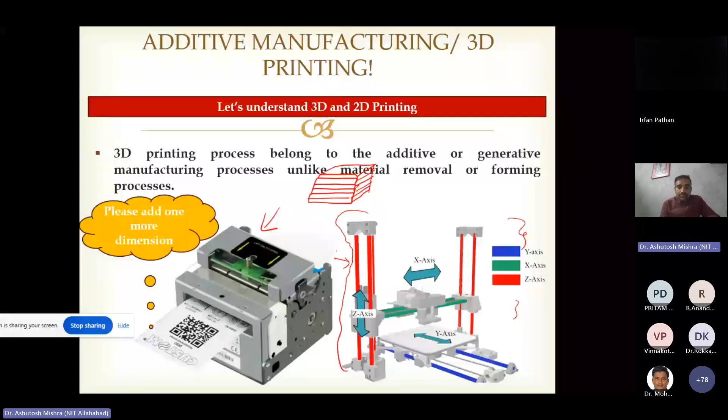And there are several precise, improved, advanced additive manufacturing processes nowadays which are actually being used for manufacturing the final finished product. Of course, certain post-finishing operations and some treatments are required, but the shape and geometry at this point is the desired one, which we require for the supply of the final product. A prototype can be a model prototype, or a scaled down model, or anything for proof of concept. So the application of additive manufacturing includes prototyping and manufacturing both.

The part is manufactured by the deposition of material, and it is used in a wide variety of industries, from shoe to car manufacturing. As we have seen long back, a car made of carbon fiber was made from additively manufactured parts, and then it was assembled. So I cannot say the whole car was made through the additive manufacturing route. But what I can say is that if there are 1,000 components, then out of those, around 100 components can be made by the additive manufacturing route.

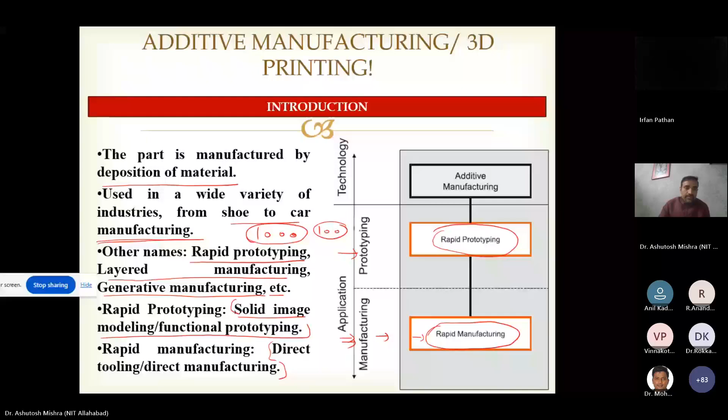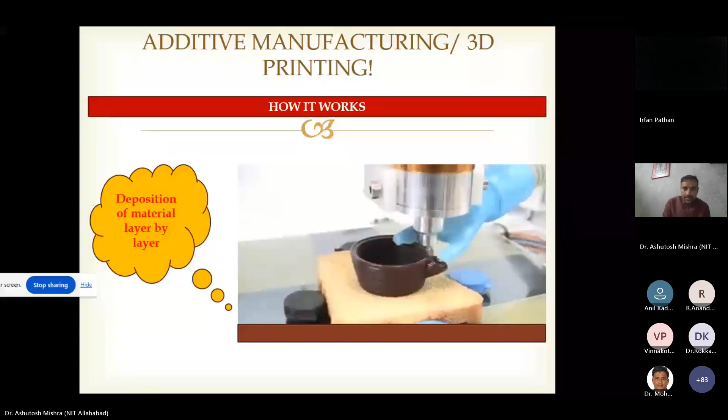Considering the full scale model, for metallic or metal based 3D printed products, there is certain literature which reports that their strength is better than the conventionally made parts. I'll discuss later in the second part how the strength of these metal products can be changed.

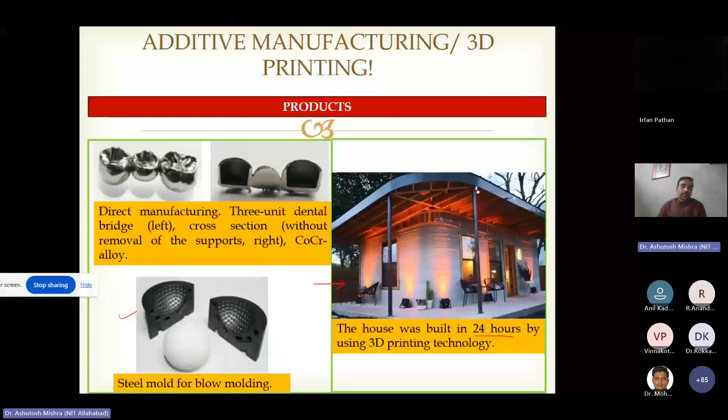Then we have solid-based additive manufacturing or 3D printing, where the raw material is solid. The commonly used process is FDM, that is fused deposition modeling, which is widely used for polymeric materials or thermoplastics. FDM was used for one of the research works which I had done earlier, so I've included a few results of that work.

Now the third is powder-based printing. One of the common powder-based printing methods is the powder bed fusion technique, and SLM falls in this category. In powder-based printing the material is powder: selective laser sintering, or SLS, and SLM, that is selective laser melting. SLS and SLM are both types of powder based printing, and mostly they are used for fabrication of metal parts.

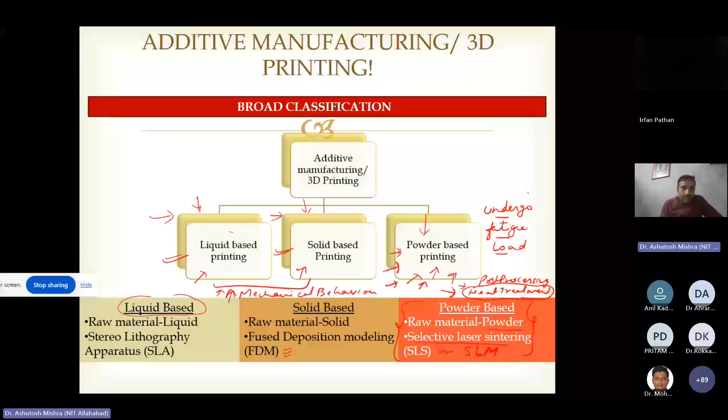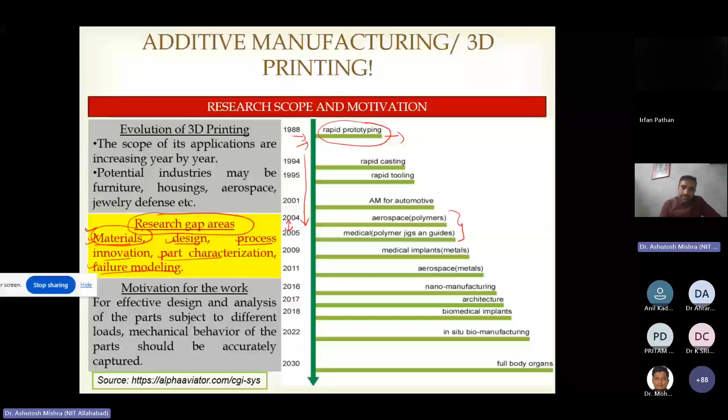Now coming to the motivation, as said, for effective design and analysis of the part subject to different loads, the mechanical behavior of the part should be accurately captured. For capturing the mechanical behavior, we can conduct experiments as well as numerical models. But as I told you, SLM printed parts are very costly to fabricate. So numerical modeling will be the tool to help us reduce the cost.

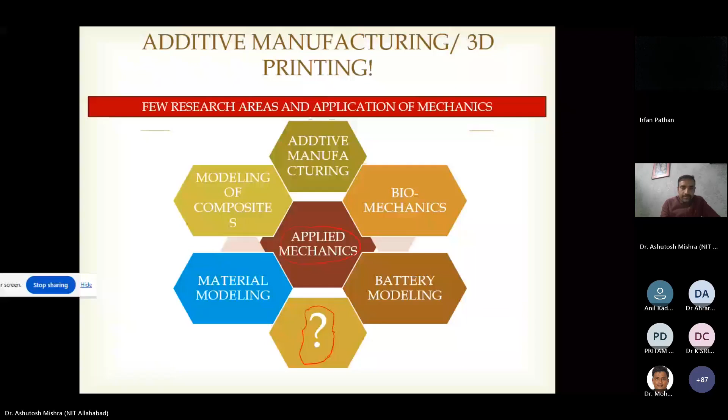So specifically, I wanted to enhance the strength of the material. If we compare the strength of conventionally made material and 3D printed material, the 3D printed material lags in strength. So if we can use some heat treatment or post processing by which we can improve the strength, we should try that. With that aim, I started experimenting, and these are a few outcomes of those studies.

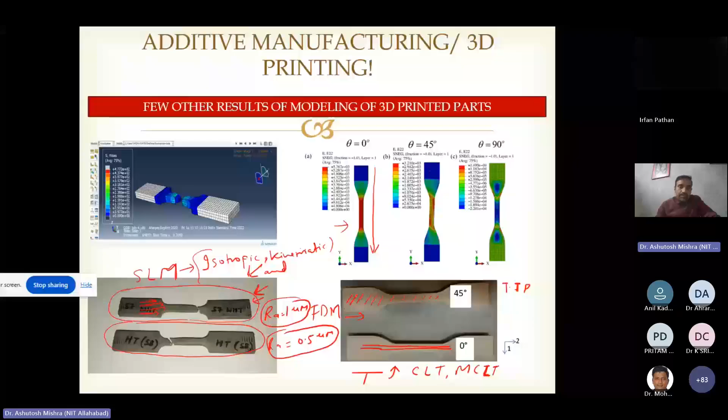Most of these projects deal with composites and finite element analysis. I'm also taking some industry projects, wherein I am teaching design of advanced shock absorbers, and teaching finite element analysis to industries, that is Munjal Showa Limited in Gurgaon.

Then we have computational modeling for design of insensitive munitions to mitigate sympathetic detonation. This is a DRDO project wherein the mechanics of the detonation process of explosive warheads is being studied.

Then there are other projects on mechanics of bones. The experimental part is done by the PI, Dr. Abhishek Tiwari, and I do the modeling process.

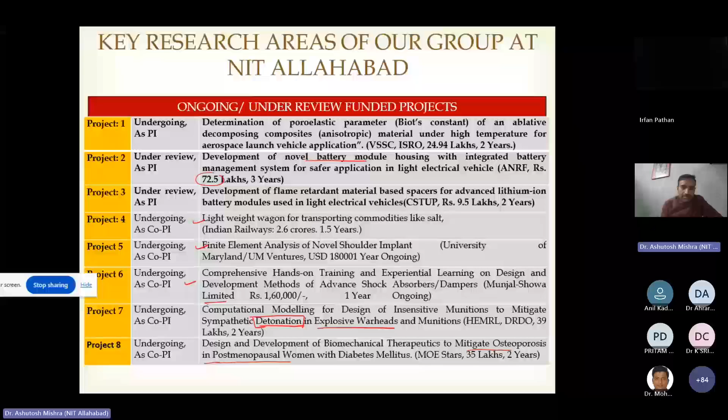Okay, coming to part 2, that is experimental and numerical modeling. So let us see.

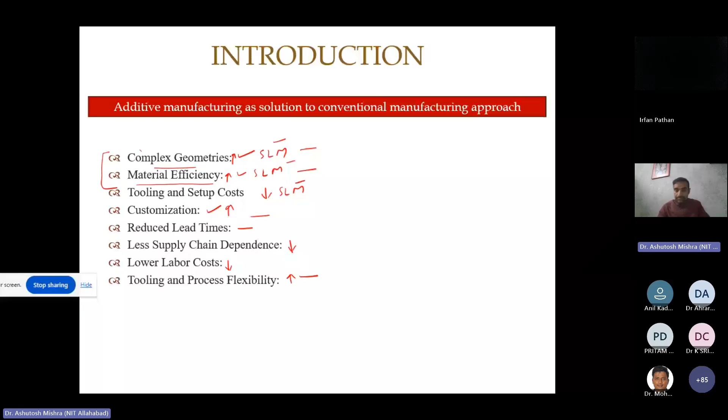Now, this section will cover the fatigue behavior of parts fabricated by SLM printing, widely used for metal part fabrication. Considering the importance and significance of the SLM process, that is selective laser melting process, I have chosen this particular process for making the part and carrying out the fatigue study.

Now, fatigue is a major load - a major failure-causing load for parts or components in moving applications, wherever there is relative motion, or machines which undergo cyclic loading. Fatigue is the major load which actually governs the failure. So I've tried to model fatigue behavior and included this in the presentation.

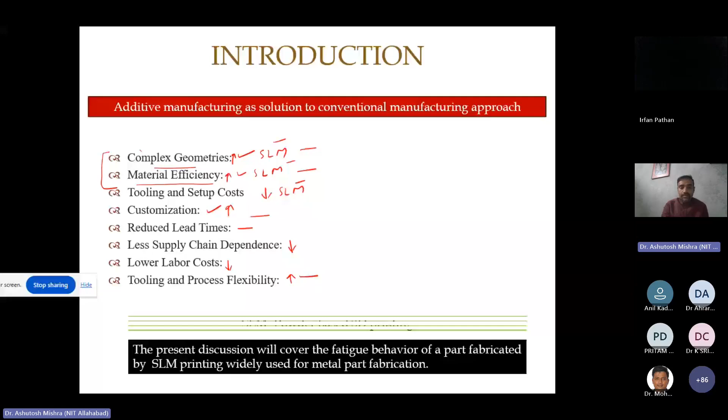The SLM is a powder-based printing process, as said. Now, fatigue is cyclic loading - just for introduction and completeness, I want to give a brief about fatigue. It's cyclic loading in the material such that localized stress leads to crack initiation, growth, and final fracture. It has two main types: HCF and LCF. The current study focuses on LCF, which is critical for assessing the mechanical integrity of materials under cyclic loading conditions. Both LCF and HCF can be strain controlled or stress controlled.

That is, if it is stress controlled, then the commonly known mode of failure is ratcheting.

That is ratcheting, that is again a mode of failure. If it is stress controlled, the common mode of failure is ratcheting. Now, ratcheting, if it is extended beyond certain load, beyond certain number of cycles, it again reduces to HCF. That is, ratcheting finally leads to high cycle fatigue failure.

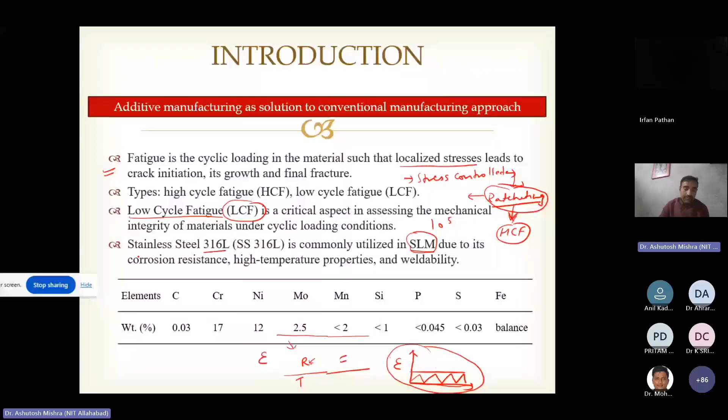There is a constraint for us also. I could not use the other, that is, I was trying to use stainless steel 316LN, but the SLM available at my place — meaning one of my consultants in Rajasthan who has made this part — they have SLM mainly used for stainless steel 316L. So they may require parameter changes, the cost will change and the parameters will change, and they do not have the expertise to change the parameters according to 316LN.

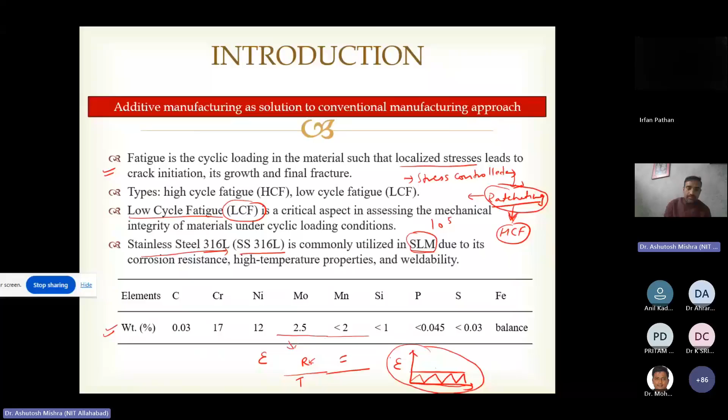So I used this SS316L material for the study, and it is a common industrial steel, so it justifies the choice of this steel also. Now the composition shown here is for reference, if someone wants to use it they can. The specifications and results are also published in Engineering Failure Analysis.

Now, before we again enter into the results and outcomes of the findings, let us understand what selective laser melting is, briefly. It is like a powder — if you see, powder is there, and between that powder there is a part, this hexagonal part. If you can see, this is the laser.

One more thing, this is not a continuous laser. It appears continuous, however it's a pulsed laser — a very high energy density pulse laser. In most YouTube videos you can see a pulsating kind of light with very high specific energy, which collides with the powder and melts it. As soon as the path is traced and the desired layer is made, the platform is lowered. Once lowered, the leveling roller again supplies powder to this particular section.

If we see the advanced form of additive manufacturing, it uses a high powered laser to selectively melt and fuse fine metal powders to create 3D parts layer by layer. It is one of the common techniques used in metal 3D printing, specifically for applications requiring high precision, complex geometries, and high material strength. So we have comparable material strength when we make parts using this method.

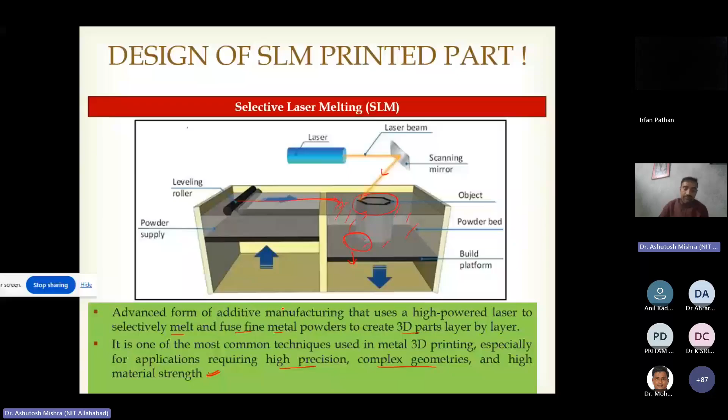This particular sample is made up as per ASTM E606, which is used for strain controlled fatigue loading.

Build orientation has a strong influence on the static and dynamic mechanical properties of SLM steels. Regardless of their building direction, the majority of SLM specimens showed inferior fatigue characteristics compared to their wrought counterparts. However, post heat treatment and post processing actually improve the fatigue characteristics.

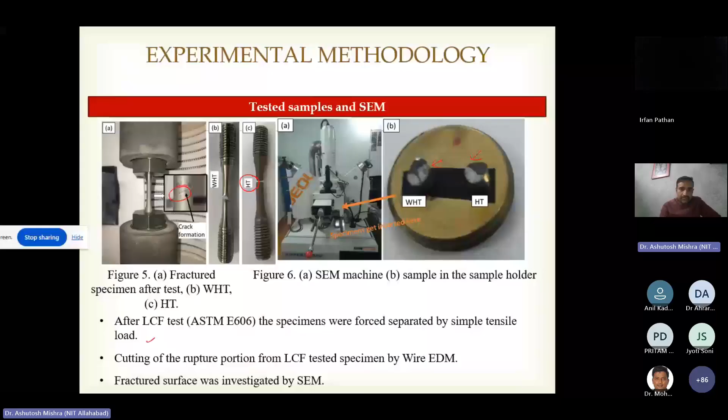Okay. Well, I considered only the length of the gauge section for modeling it in Abaqus. The data which is written is slightly, it's a typographical error. Then I've considered hexahedral element shape and swept meshing technique for linear 8-node brick element of C3D8R element type.

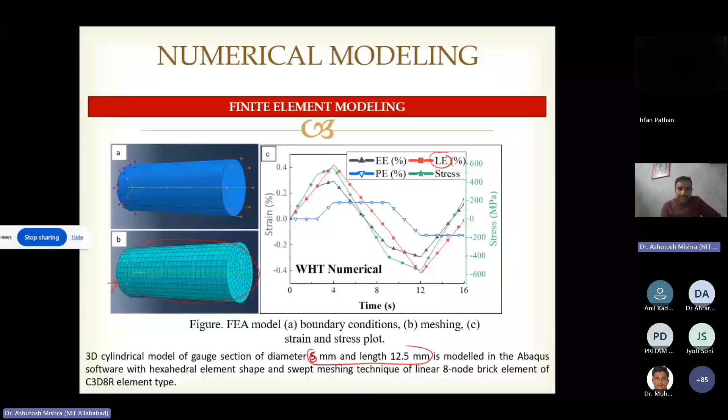And for modeling in Abaqus, we can import the cyclic results in other softwares. So I have included up to modeling of the fatigue behavior up to stabilized cycle.

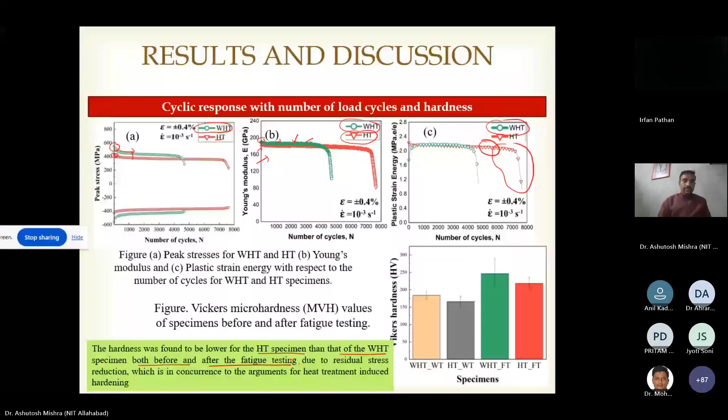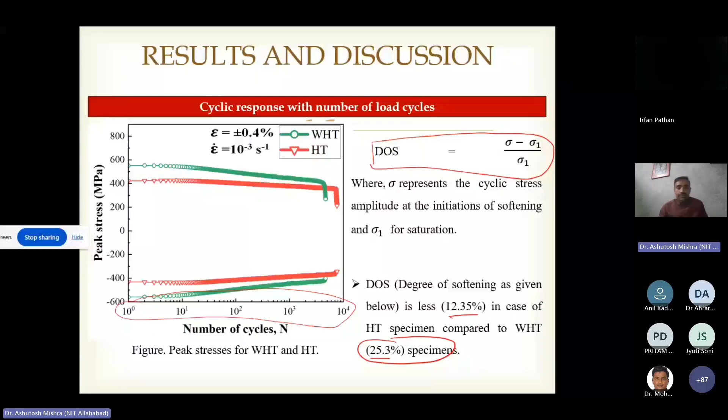Then we have carried out the fractography and fatigue failure analysis, wherein in WHT we see that there is more unfused material. However, after heat treatment, unfused material is less, and this again concurs with the existing knowledge that heat treatment actually reduces the unfused material.

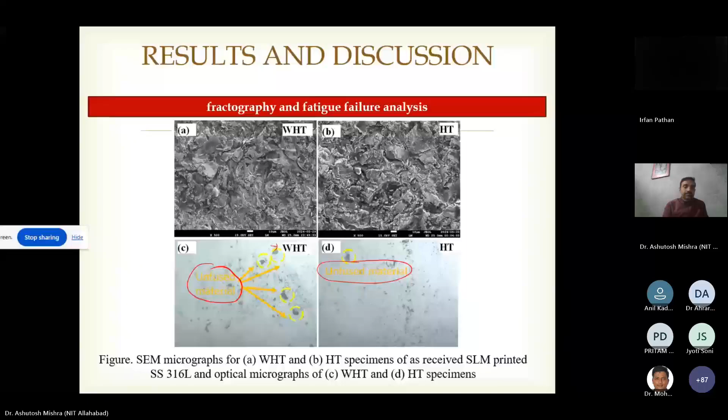Although this is a powder bed fusion technique, so we actually require heat treatment. Then several other information where we have noticed in the scanning electron microscopy, and optical microscopy also has been done. This is just to correlate the findings of the fatigue failure analysis, wherein we have seen striations, pores, unfused material. Here the unfused material, number of striations are differing.

Now, crack initiation in this particular heat treatment, we see that intermediary or what we call as crack branches are seen here. However, at the surface also we can see, and for WHT specimen, we can see cracks at exterior part of the part. However, internal cracks are seen in heat treated parts. These internal cracks are of very less dimension, that is, we call it as micro cracks.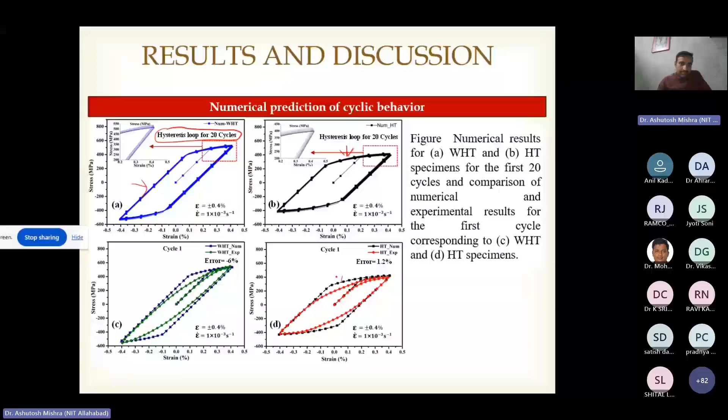Now, once the cyclic hardening is traced, then I have carried out the test for stress cycle. That is, it is tracing the stress versus cycle number plot. Now, if we see experimental tensile, numerical tensile, experimental compressive, numerical compressive, it means the compressive and tensile stress at each cycle, the positive and negative cycle, the maximum values are traced. The numerical and experimental curves are actually matching satisfactorily. For both WHT and HT specimen for 20 cycles I have carried out, and the parameters are identified. That has been published also.

So we can actually model the fatigue behavior using Abaqus, particularly for SLM, because SLM parts closely resemble conventionally manufactured parts. The parts which are manufactured through SLM are nearly equal to conventionally manufactured parts. So that is why this particular model, the Chaboche model, which is widely used for metal, has been implemented in Abaqus for modeling this particular 3D printed part instead of composite approach. However, for FDM, we should not use Chaboche modeling. For FDM, we should use composite approach only, and that has also been published in one of my literature.

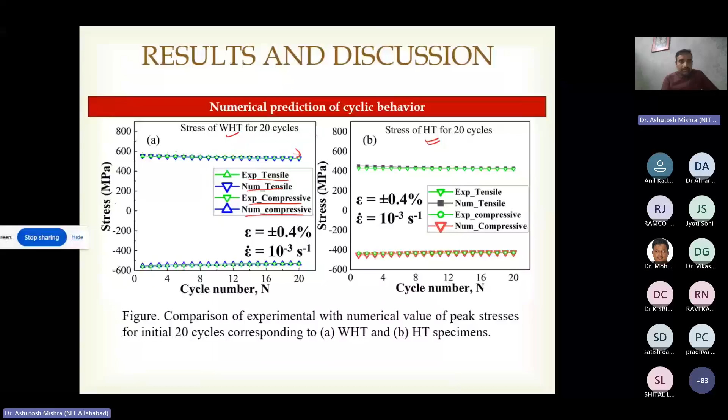Now, both in tensile and compressive modes, due to symmetrical load, the specimen exhibited similar behavior. Figure shows rapid initial softening followed by a region of slower or nearly saturated conditions that prevailed after 20 cycles. It is observed that peak stress values with cycles are higher for WHT than for HT specimen. This has led to the rapid damage accumulation in WHT compared to HT.

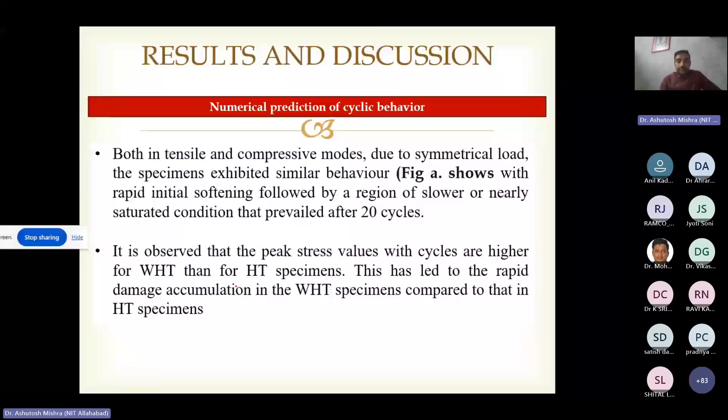Now, important takeaways. This is the last part and the conclusion. If we see the heat-treated specimens, HT specimens have exhibited 62% higher fatigue life compared to WHT specimens, while the WHT specimens have higher peak stress than HT specimens, indicating heat-treatment-induced softening in HT specimens for the initial few cycles.

The second takeaway is that the energy absorbing capacity is enhanced after the heat treatment of the SLM part. Also, the SLM printed SS316L exhibited a reduced Young's modulus after heat treatment, which suggests that tensile strength is decreased by heat treatment. This is particularly for this study. However, this requires further consolidation because the reason for microstructural coarsening or microstructural refinement is still not very clear. Why such a thing is happening is again a part of a study which is carried out here.

Then the degree of softening was found to be lower for the HT specimen compared to the WHT specimen, which exhibited around 25.3% degree of softening. In most engineering applications, early stabilization of cyclic behavior is desired to prevent cyclic strain accumulation. Thus, the progressive damage due to cyclic strain is negligible for the HT specimen. Progressive damage means ratcheting. The cyclic strain accumulation is negligible for the HT specimen. Consequently, an increase in fatigue life is observed. So, very little ratcheting is seen in the HT specimen.

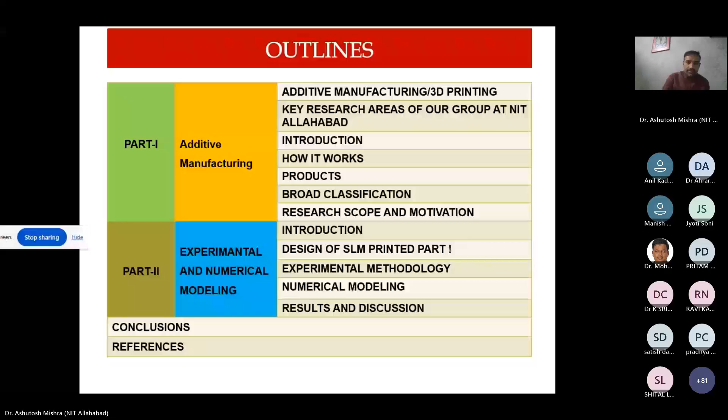Now there is a range of powder sizes. Let me show you the slide. Powder size is 50 micrometer. So I have used it as a single value. However, there is a distribution of such powder sizes. So instead of using a fixed powder size, I should have used the standard deviation. The standard deviation should be very small. And it is very difficult to get powder of uniform size from any powder metallurgy method. So we need to segregate powders according to the particular machine and specification, within that specified range.

Like the Renishaw AM400 machine, it is suitable for manufacturing parts with 50 micrometer powder, plus or minus some tolerance. That information must be available with the manufacturer or the fabricator. But as of now, I can say that maintaining a fixed powder size is a very difficult task. A lot of things need to be done to maintain such a powder size. And it will affect the quality of the product.

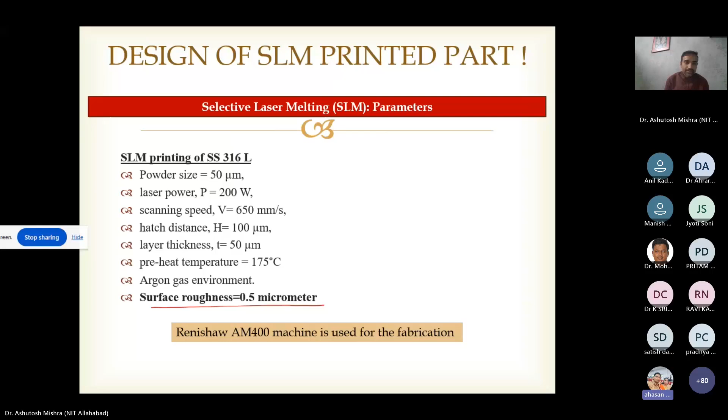There must be a size limit also. That is what I want to know, what will be the minimum and maximum? There must be a size limit, which I can search and give it to you. I'll download it. Okay, sir. If it is possible, sir, please. Yes, sure, sir.

Sir, you have used SS 316. Are other materials also possible on this AM400 machine, or are there limited materials? Yes, sir, there are several others. The problem is the supplier, the person who supplies these parts to me, does not have the expertise to change the parameters of the machine for different materials.

Although the capability of the machine is there, we have one machine at IIT Ropar also. Again, there is a problem of expertise. They do not know at what power or what the laser pulses should be. The parameters change with the material. Most people have developed the expertise to deal with SS316L. That is why I considered it, because it is a widely used steel.

For other materials like titanium, we have a supplier in Bangalore who supplies titanium alloys also. So there are several sources which have developed their expertise in fabricating different materials.